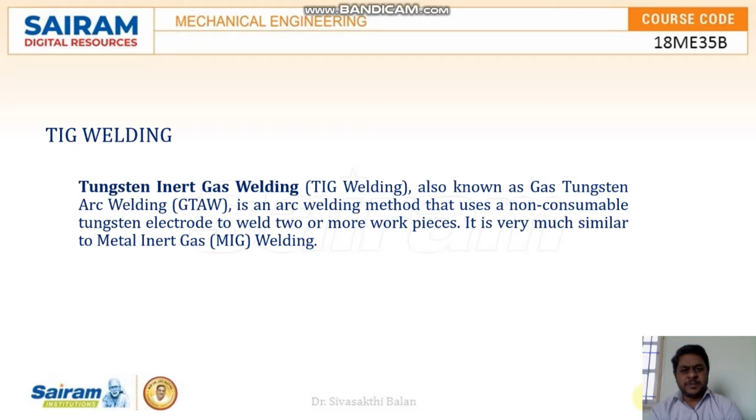The components used for tungsten inert gas welding, TIG welding, are power supply, which might be either AC or DC, a non-consumable tungsten electrode, inert gas supply, filler rod, and the welding head.

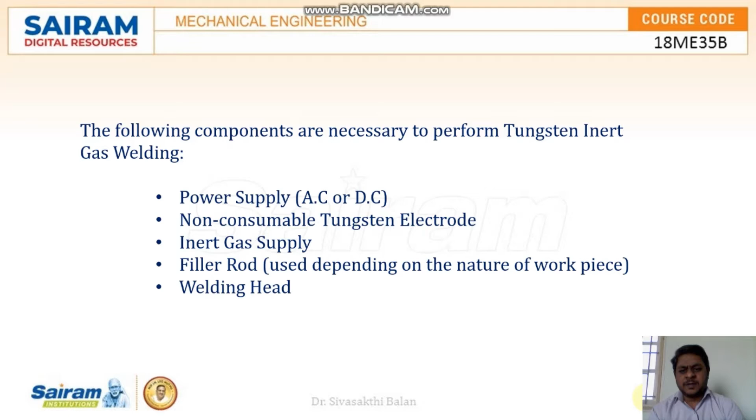The working principle of TIG welding is as follows.

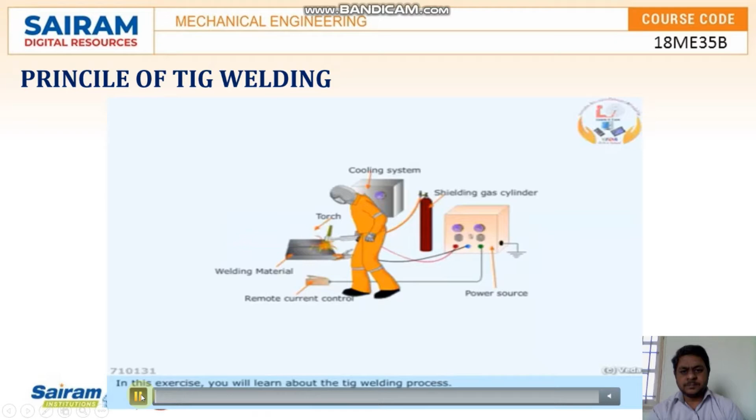Now we are going to learn about the TIG welding working process. The main equipment required for TIG welding are AC or DC power supply, welding torch, electrode, shielding gas cylinder, cooling system, and remote current control.

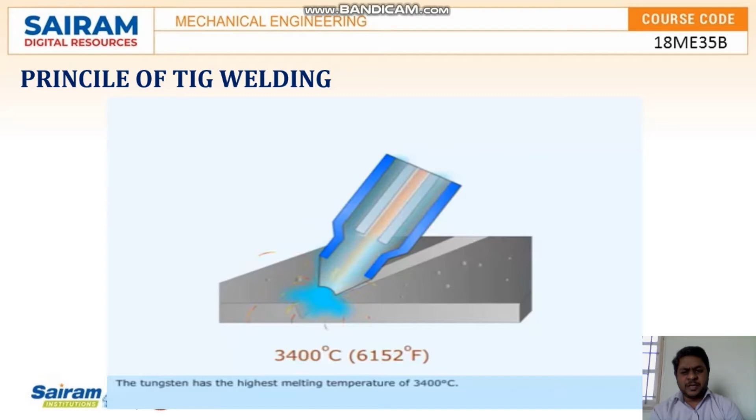The welding torch utilizes a non-consumable electrode made up of tungsten metal. Tungsten has the highest melting temperature of 3400 degrees centigrade. The diameter of the electrode may vary between 0.5 to 5 mm, and their length may vary from 75 to 150 mm.

The welding torch is connected with cables to the power supply, and with hoses to the shielding gas source and cooling system.

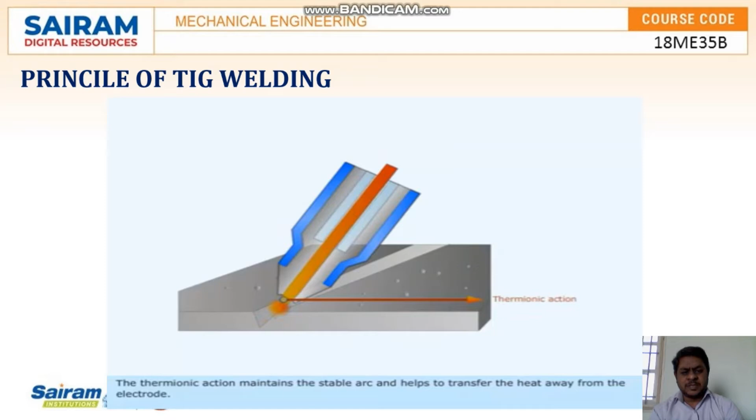When the power supply is switched on, power is transmitted from the power source to the electrode and generates an arc between electrode and workpiece. The thermionic action maintains a stable arc and helps transfer heat away from the electrode. The tungsten electrode, with a melting point of 3400 degrees centigrade, can support an arc temperature of 6000 degrees centigrade without melting, since most of the heat is carried away from the electrode by thermionic action.

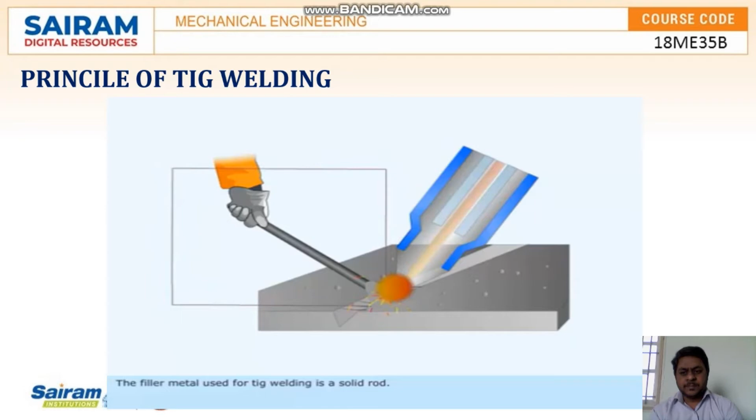Due to the high temperature of the arc, the metal edges get melted and joined together. The metals are also joined using a filler rod. The filler metal used for TIG welding is a solid rod, available in different sizes for the welding process. During welding, the torch angle must be about 15 to 20 degrees away from the direction of travel. When the filler rod is used, hold it as low as possible and avoid touching the tungsten electrode.

Due to high temperature from the power supply, an arc is produced between the tungsten electrode and workpiece. The electrode in the torch melts the base metal by generating an arc, and the base metal melts the filler rod for a perfect weld. While the arc is produced, the inert gas passes through the holder and surrounds the electrode and the arc.

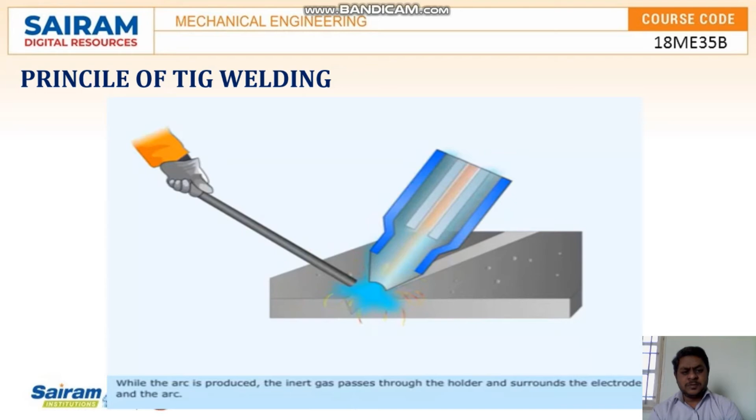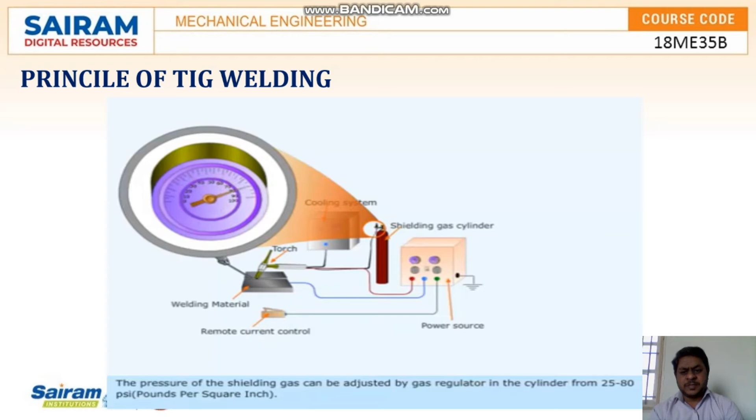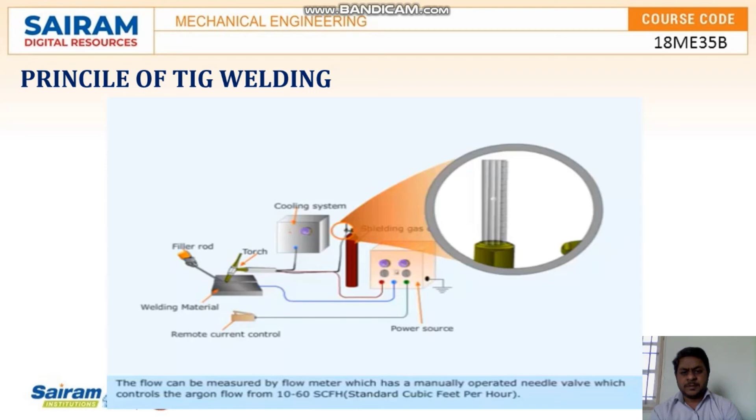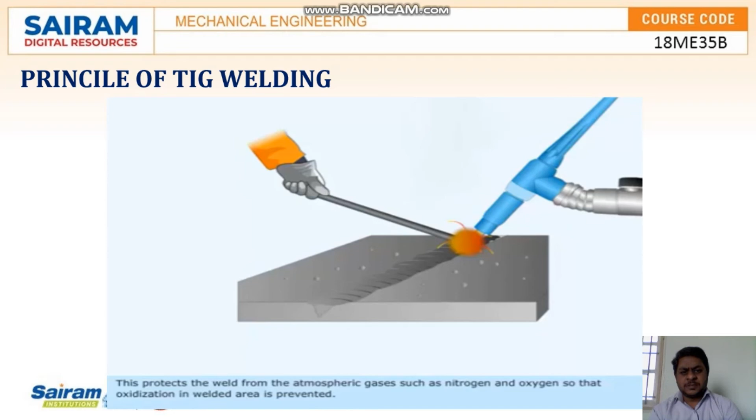The pressure of the shielding gas can be adjusted by a gas regulator on the cylinder from 25 to 80 pounds per square inch (psi). The flow can be measured by a flow meter, which has a manually operated needle valve that controls the argon flow from 10 to 60 standard cubic feet per hour. This protects the weld from atmospheric gases such as nitrogen and oxygen, so that oxidization in the welded area is prevented. As a result of this shielding gas, a clean and precise weld is formed.

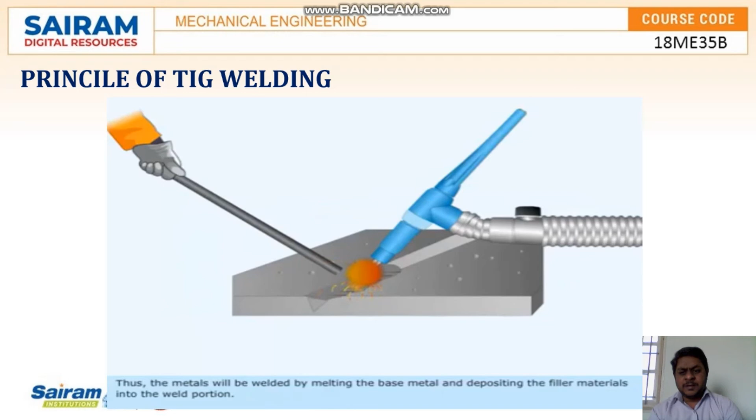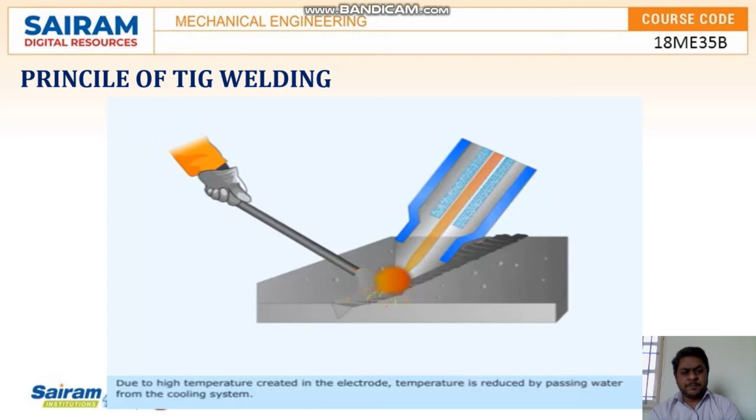Thus, the weld is created by melting the base metal and depositing the filler material into the weld portion. Due to high temperature created in the electrode, the temperature is reduced by passing water from the cooling system. Remote current control is used to change the welding current occasionally without going near the power source.

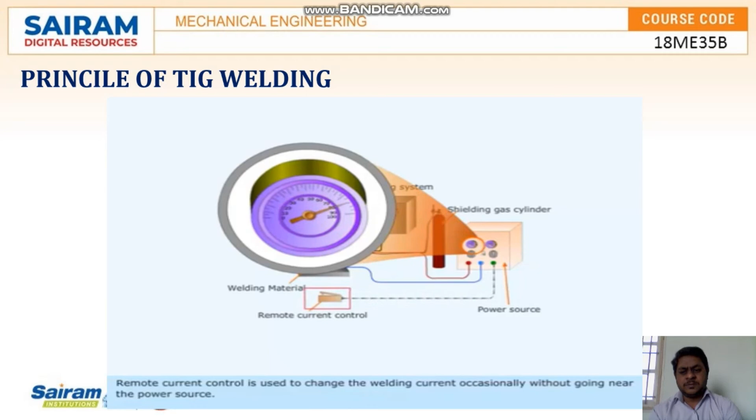This welding is a very good process for welding non-ferrous metals such as aluminium, titanium, and stainless steel, etc.

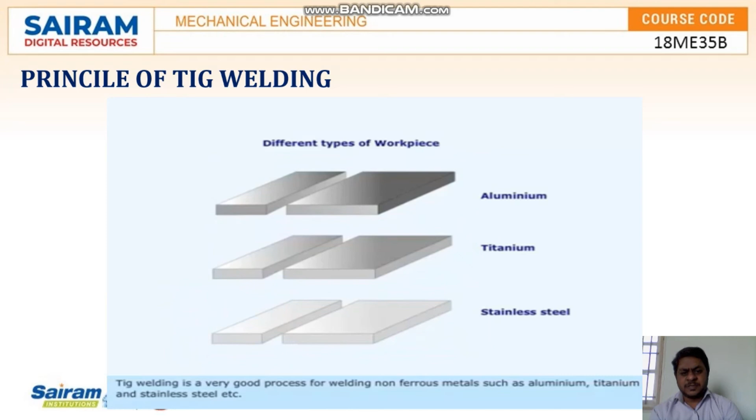This is the schematic diagram for the TIG welding.

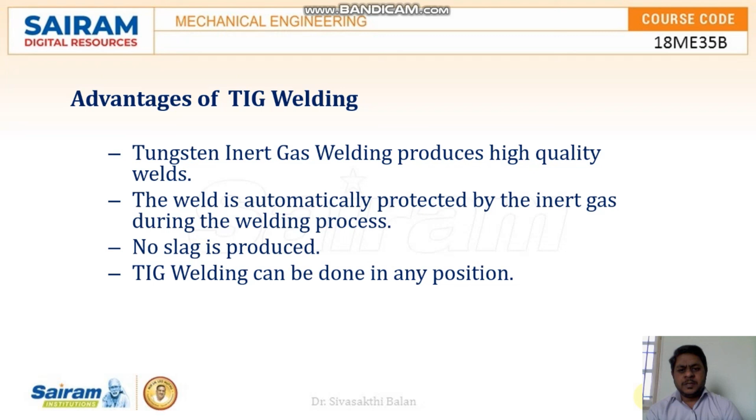The advantages of TIG welding: it produces high quality welds. The weld is automatically protected by the inert gas during the welding process. No slag is produced, and it can be done in any position.

The disadvantages are: it's a slow process, highly skilled labor is required, the welder is exposed to a huge intensity of light, and TIG welding is more expensive when compared to MIG welding.

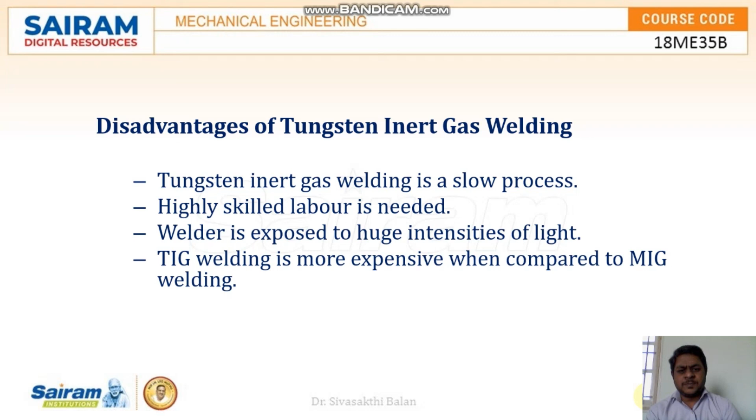Applications of TIG welding: we can use this welding for a variety of metals such as stainless steel, alloy steel, aluminum, titanium, and copper, etc.